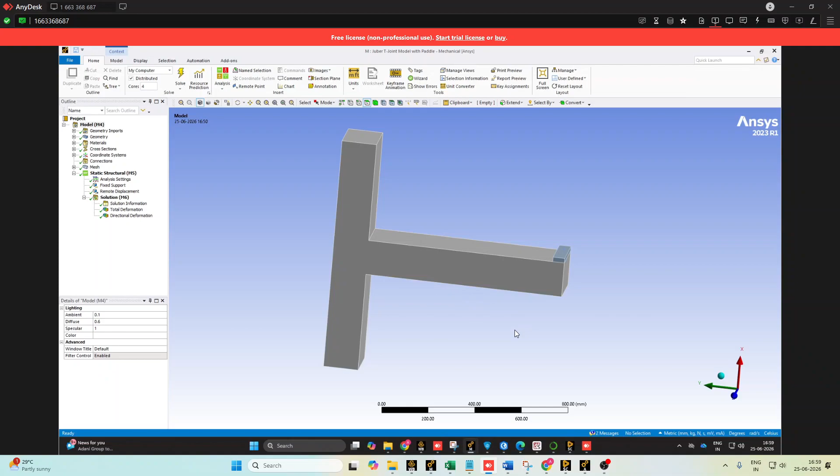Today we are going to see the analysis of a beam column joint under a cyclic load testing. This is the model that has been modeled and imported to the ANSYS Mechanical part.

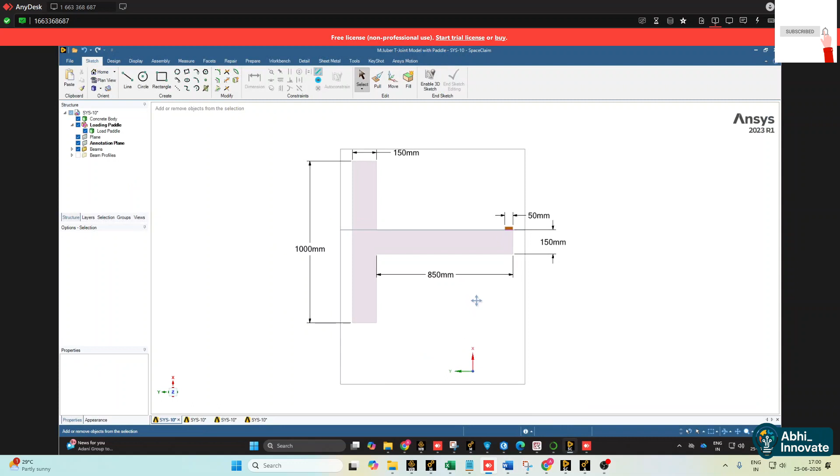If you ask me the geometrical specifications of this model, I would like to show you some specifications here. This is the same model which I have imported in the workbench. This is a concrete body, and there is a loading paddle here, which is 50 mm wide and 20 mm of thickness.

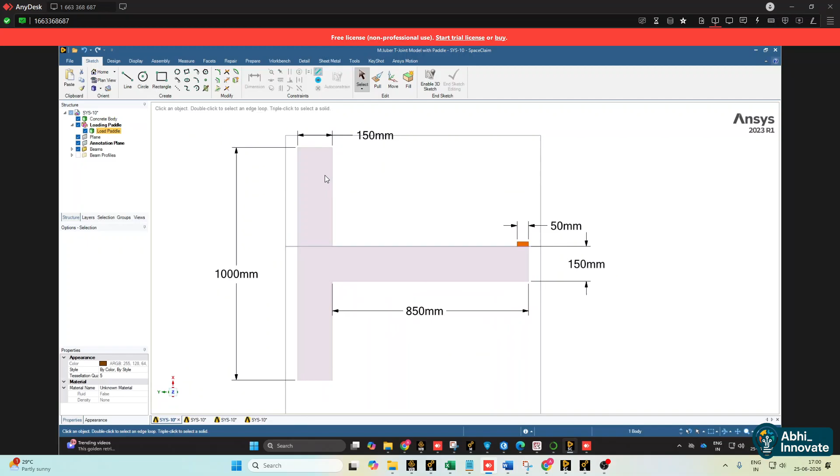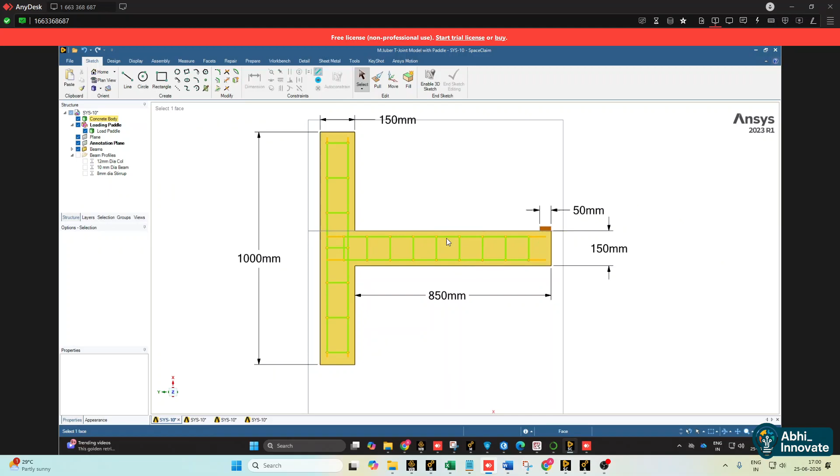Then it is a reinforced beam column joint. In case if you want to see the reinforcement, you can see it here. The 12 mm diameter is provided for the column side, and 10 mm diameter is for the main beams, and all the stirrups and ties are of 8 mm diameter. So these are the geometrical specifications of this model.

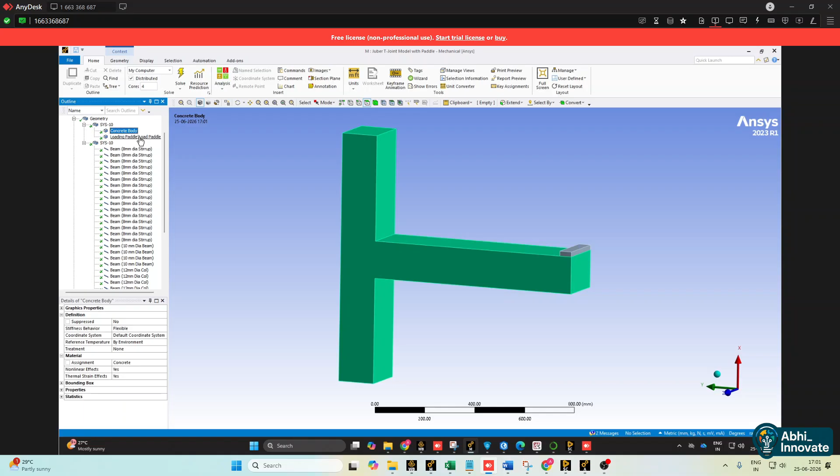The same model has been shared to ANSYS Mechanical, which I will be concentrating on here. You can see this model here. This is a T beam column joint. The material concrete is being given to the entire concrete body, and the loading paddle is taken as structural steel.

So all of the entire reinforcement, let me show you the reinforcement here, is of structural steel. One more important thing is you have to make this as a reinforcement. You should make sure that it is set as a reinforcement, so then it will act as a reinforcement, and ANSYS will consider it as a reinforcement.

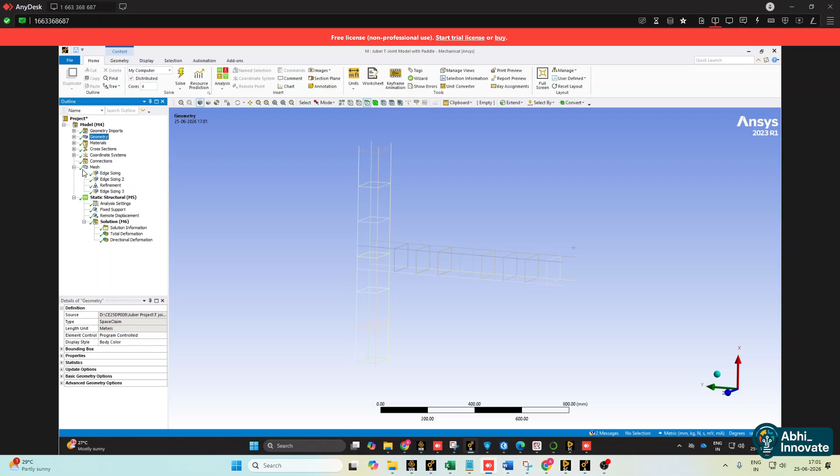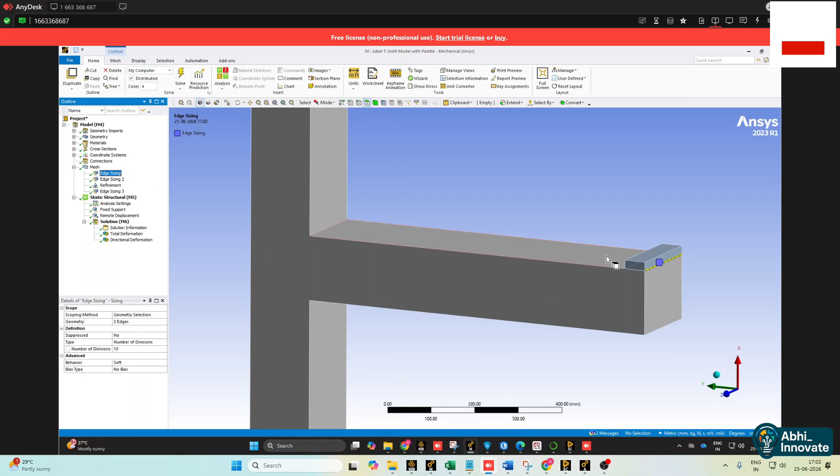Now coming to the mesh properties, I have taken a very fine mesh at the location where I'm going to apply the load, at the free end of the beam. You can see that I have applied edge sizing, to get a proper meshing at the interface of the edges of all the paddle with the beam.

So here there are two things, one is horizontal and one is of the width. So two different sizes you have to apply there, otherwise it will become too fine for this. Here the number of divisions is 5, whereas for this corner, the number of divisions I have given as 10.

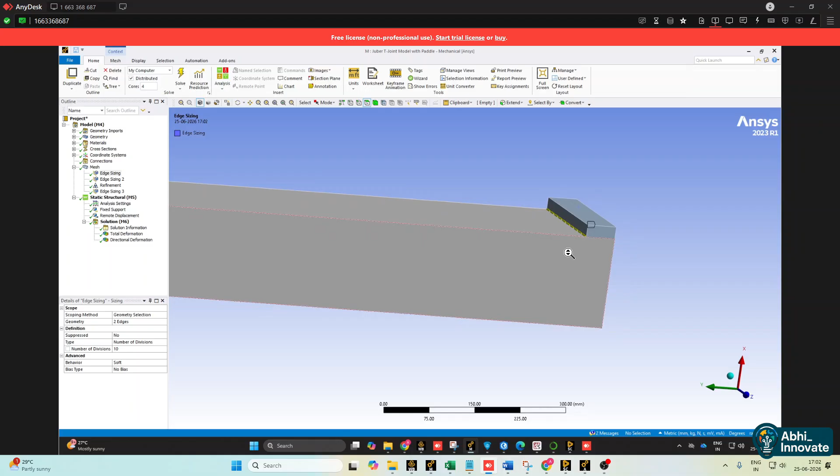Since it is a deformable body, we can keep the behavior as soft. In case if I was using steel or reinforcement or rebar, then I would have kept it as a hard part. So this is how it is being done.

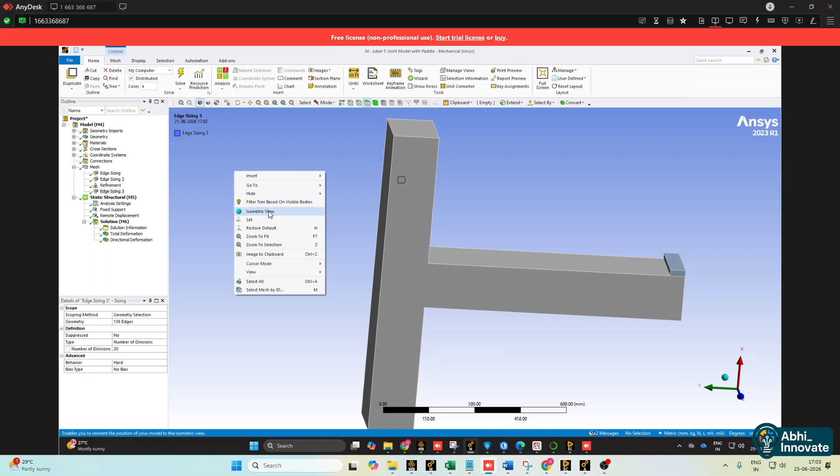You can see for the rebar cage inside, let me show the rebar cage. Here for the rebar cage as well, I have applied the edge sizing. Only thing is I have made the total number of divisions as 20, and because of which the behavior is really hard.

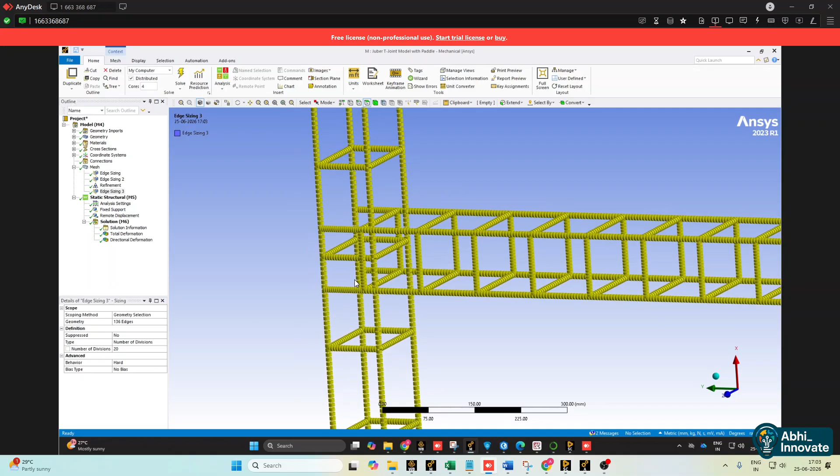So this is what has been created till now, and this is about the meshing part. If I have to speak about the refinement part, so refinement, what I have made is taken a refinement of the loading area, where I want the mesh size to be very fine, which will give me better results. So this is all about the meshing.

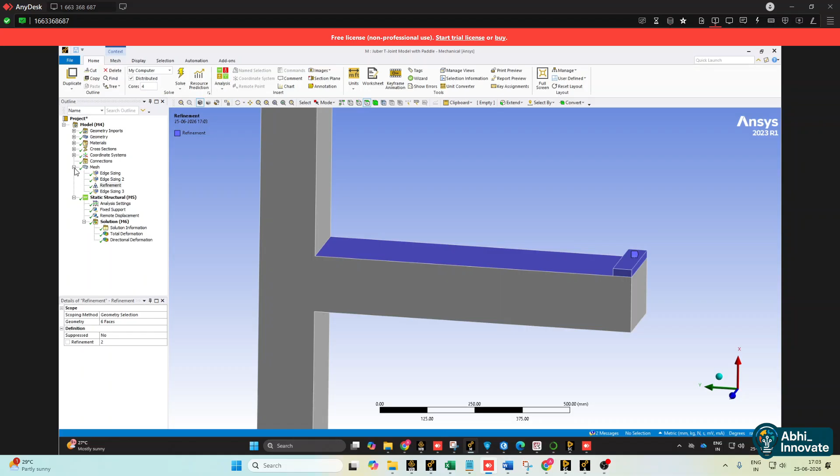I have considered the element size as 15 mm, and considering the span angle center as medium. By default it is coarse, but I will consider that as medium now, and then I will run this analysis.

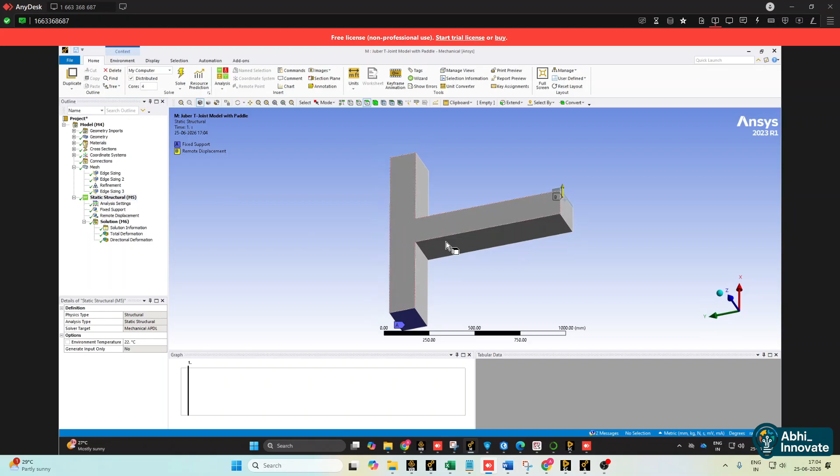Before that, we have to apply a load, we have to apply the boundary conditions. I have applied fixed boundary conditions at the two faces of the column, due to which it will not deform. This part is not allowed to deform. So the only load applied will be at the free end of the beam.

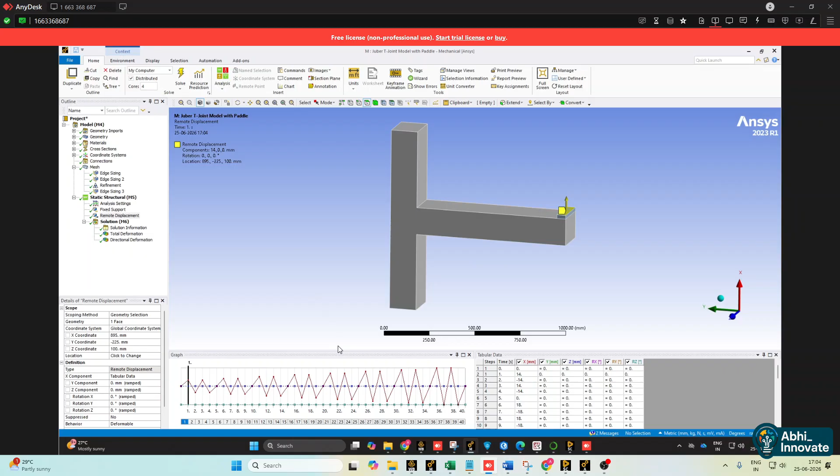So next one is the remote displacement, how I am applying the load in the form of a displacement. Let me explain what settings you have to make to apply this as a load.

In the analysis settings, you have to create the number of steps as 40, whatever is required for your analysis, you can create that. Here I have turned on auto time stepping, and the initial substeps are 10, minimum substeps are 5, and maximum substeps are 60. This will ensure a proper analysis.

So here the number of steps is 40, like the load will be applied in this pattern, what you are seeing here.

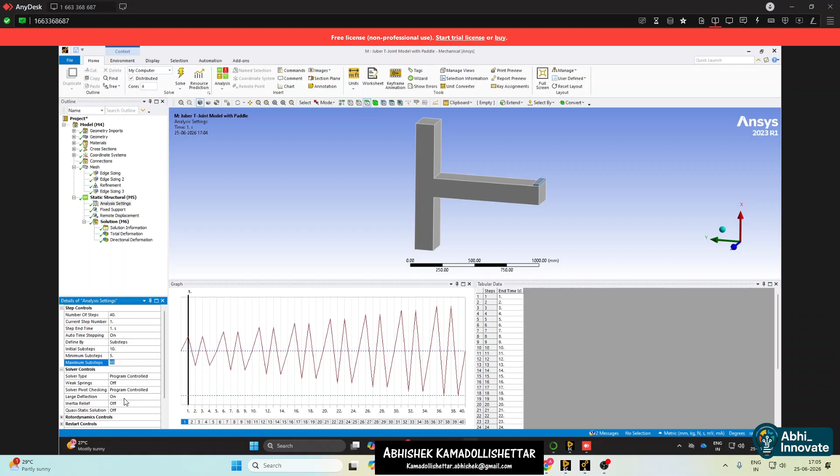Please keep the large deflection on to simulate the nonlinear behavior of the beam column joint. This is the settings you have to make sure for the nonlinear analysis of the beam column joint under cyclic loading. Now let me explain about the remote displacement and how you can apply it.

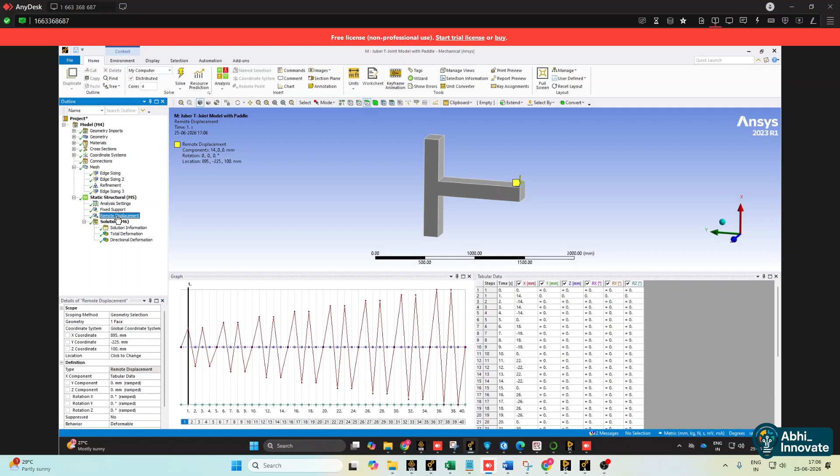When you create the number of steps as 40, automatically 40 rows are generated here as tabular data. Since I am loading in the x direction, the load is applied along the x direction, so I have to consider the x component to be tabular.

For the x component, refer to the table for the cyclic load. It means referring to the table to apply the load. The software refers to this table, whatever you input here, and according to that, the graph is shown and it will apply.

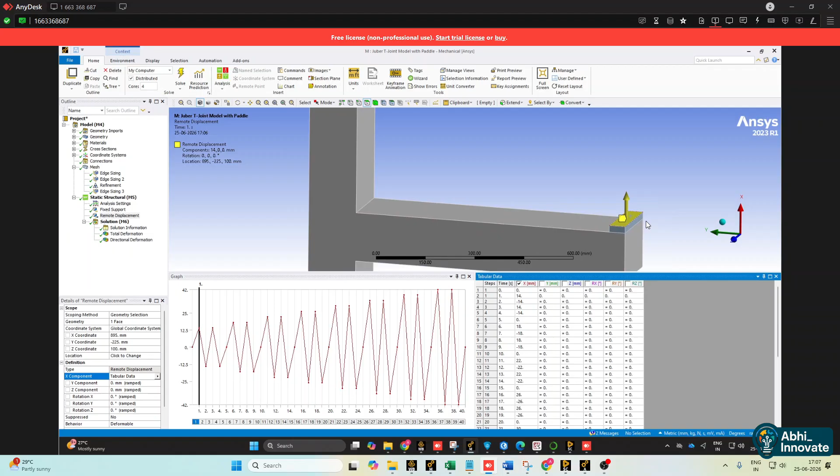The rest of the components I have kept as 0 - y, z, and the rotations at all points x, y, z are 0. You can turn off these things here since it's not necessary, so only time and x displacement is being written.

I have created the load starting from 14 mm to around 42 mm with an interval of 4 mm. With a step of 4 mm, I have applied the load.

For example, initially it is 0, then it will go to 14, plus 14, minus 14, plus 14, minus 14, and again it will come back to 0. You can see here: 0 mm, 14 mm, minus 14, 0 mm, minus 14 mm, 0.

Again, just by an increment of plus 4 mm, similarly you repeat 18, minus 18, plus 18, minus 18, 0. Again with an increment of 4 mm: 22, minus 22, 22, and minus 22. In this way, you apply the load till 42 mm.

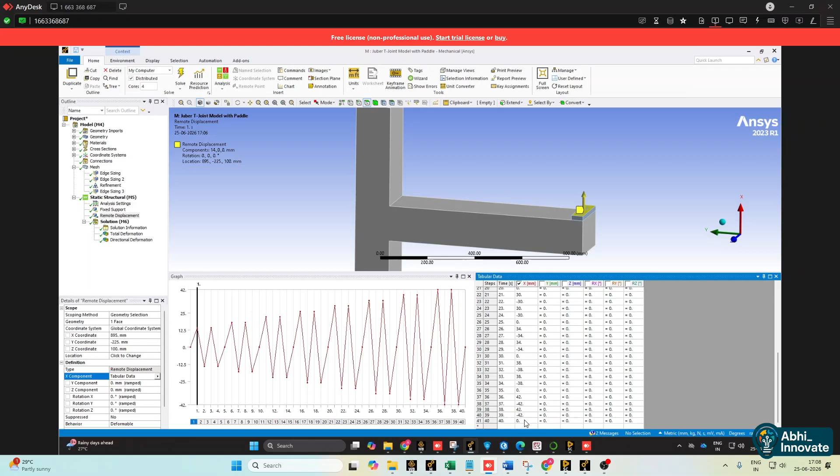So this is what I have applied for this beam column joint. After doing so, while doing the solution, please make sure you select beam section results as yes, and then run the analysis.

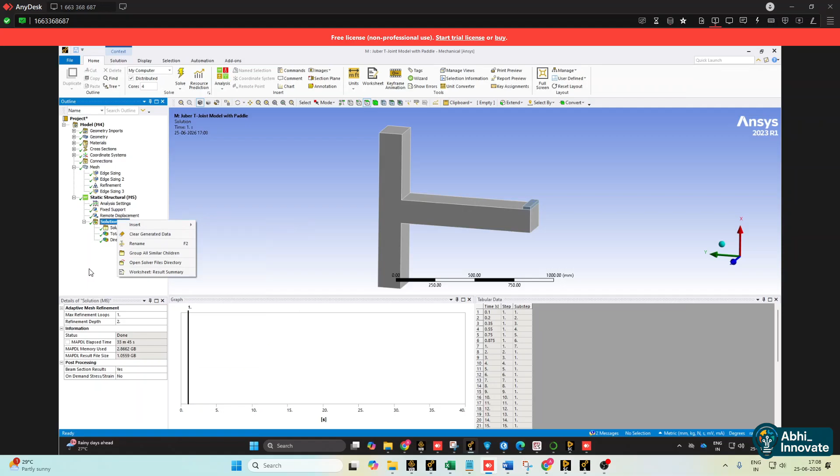It will take a considerable amount of time - for me it took 33 minutes 45 seconds, which I think is too long. So you have to let the analysis run for some time, and then later you can analyze the result. After the analysis, I got the deformation part here.

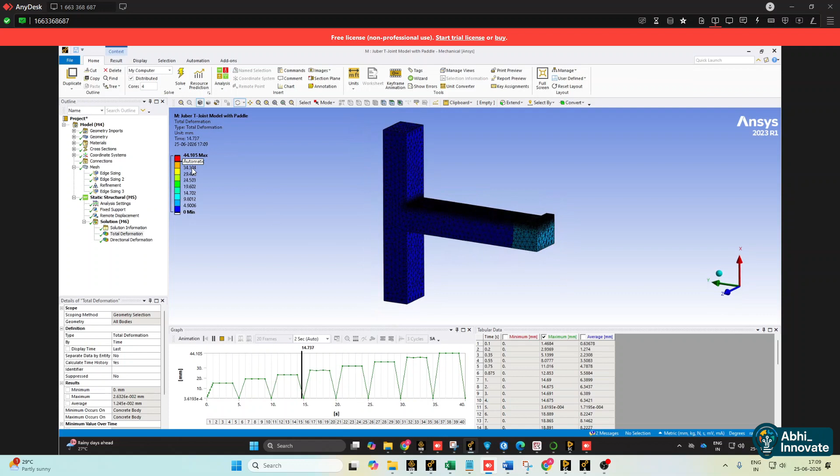You can see the results I have got. I will only consider the maximum values. Just to run the simulation, you can see how the load is applied at this end. The total deformation is 44.165, that's the maximum part.

If you want the x direction deformation only, this is the x form: 43.621 mm, deformation of the beam. This is the deformation of the beam, where it is showing the red color.

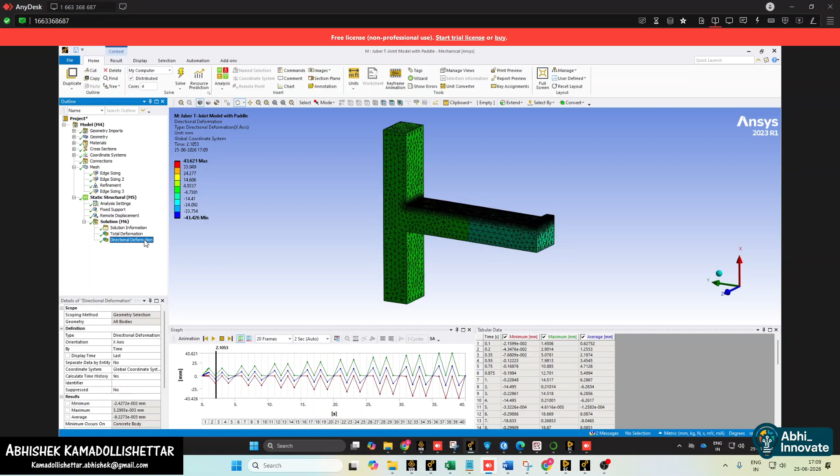This is the free end deformation maximum value. Similarly, you can refer to some other results, such as maximum principal stress, if you want that result you can get that too.

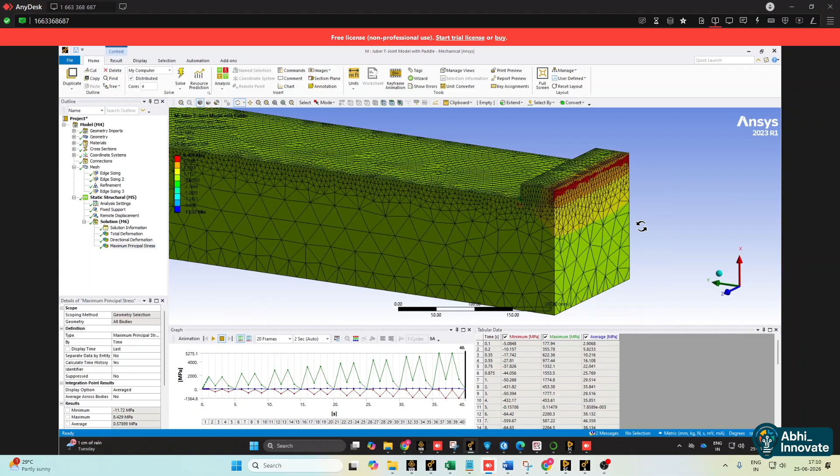This is around 8.429 MPa. You can see that this beam has not reached its failure load - it is still capable of taking the load. In that case, we can increase the displacement value, so that it will reach the maximum principal stress, which is specified around 30 megapascal for this beam or the concrete.

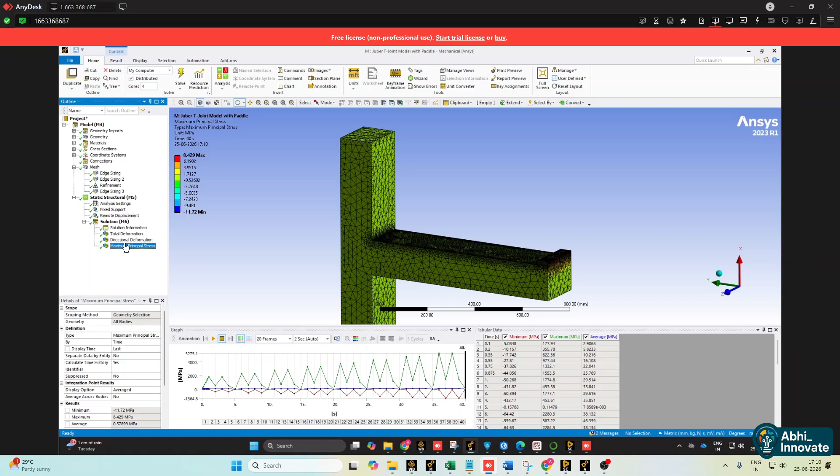Till then, you can start loading. Now, if I start loading it will take time, but this is how you can start loading.

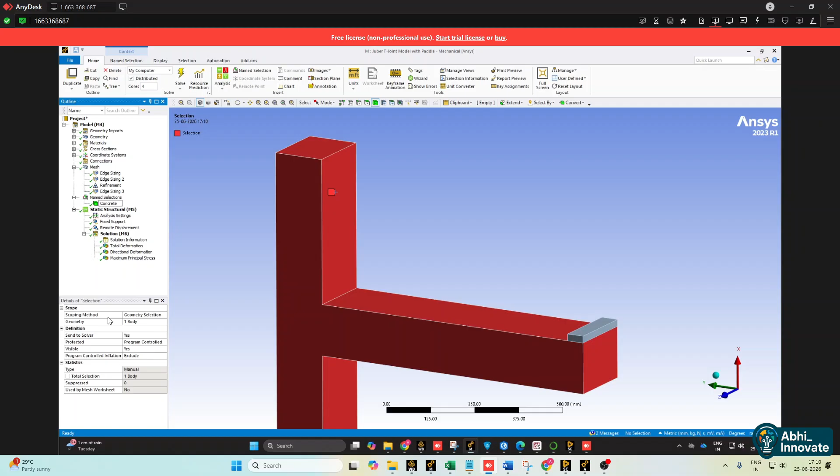One more thing I can show you is you can create a named selection specifically for concrete. So you can rename this as concrete, to see the part-wise stresses.

If you want to see the part-wise stresses in the beam, in the concrete or in the steel, select the named selection and it will be observed here. So you have to again retrieve this result.

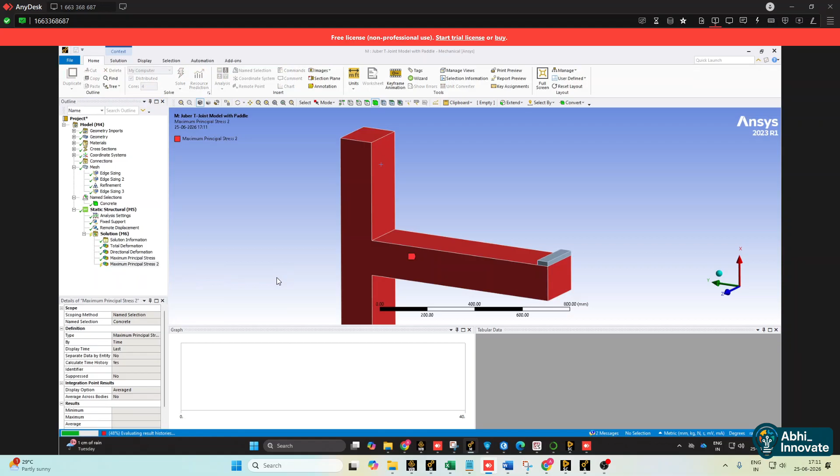Once it runs, you can see that it is almost the same, 8.429 megapascals. So still, the beam has a capacity to withstand the load. We can continue this process until it fails.

And in this way, you can analyze a beam column joint under a cyclic loading condition.